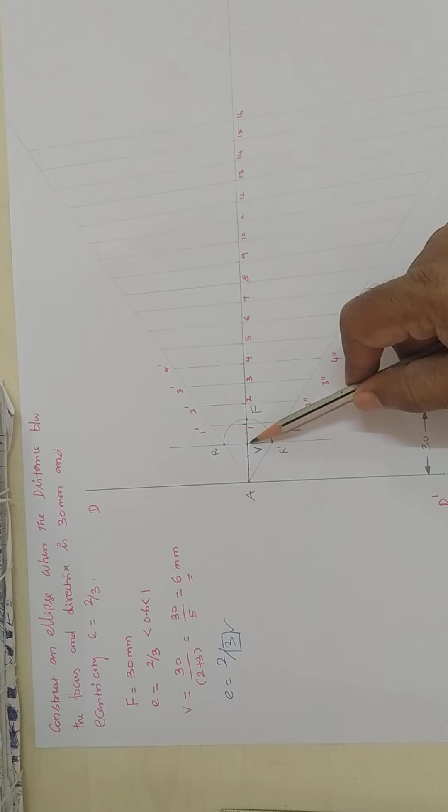Dear students, after marking the 10 mm, 10 mm, 10 mm, the distance between the lines is 10 mm. Then draw the vertical line on each point which intersects the horizontal line. Okay. Then after that, you have to give the name after the vertex point as 1. That number is given as 1. Next line is 2, 3, 4, 5, 6, and so on.

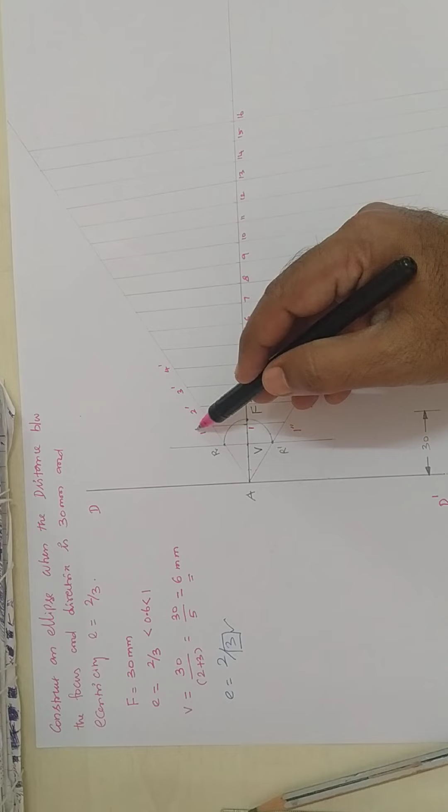For the number 1 line, the top representation is 1 dashed and the bottom representation is 1 double dashed. Here it is 2, second line, top is 2 dashed and 2 double dashed. Third line 3 dashed, 3 double dashed. Fourth line 4 dashed, 4 double dashed. And fifth line 5 dashed, 5 double dashed. 6 dashed, 6 double dashed. 7 dashed, 7 double dashed. 8 dashed, 8 double dashed. 9 dashed, 9 double dashed.

Definitely you have to mark these points, very important, because based on this measured value we are going to make an arc in the drawing. 12 double dash, 13 dash and 13 double dash. Okay.

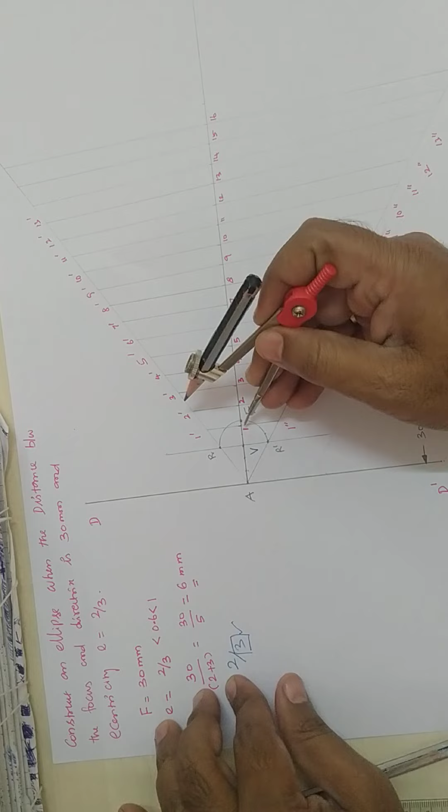Next I am going to measure the values with the help of the compass. First, I have to take the vertical distance from point 1 to 1 dashed. You remember why I told you the numbering is very important? See here, I am going to mark 1 to 1 dashed, right? Vertical distance 1 to 1 dashed, and I take off the compass. Then go to the focus point, keep the focus point as the center. You make an arc on the same line on which you measured the height.

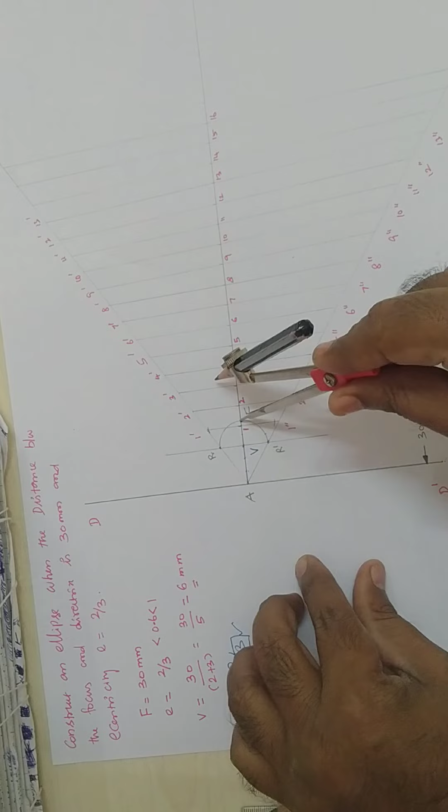With the focus point as the center. Next, measure the value from 2 to 2 dashed. Okay, then go to the focus point again and make the arc on the same line. This is very important. Then go for the third line, measure the height of the third line, then move to F, make the arc on the same line. Here it is.

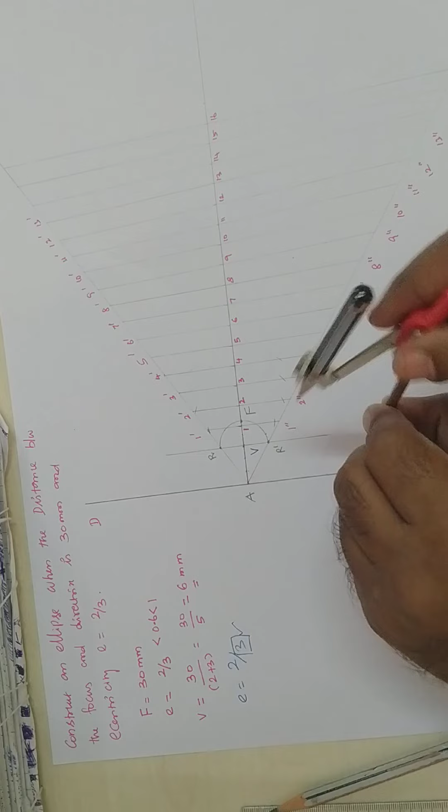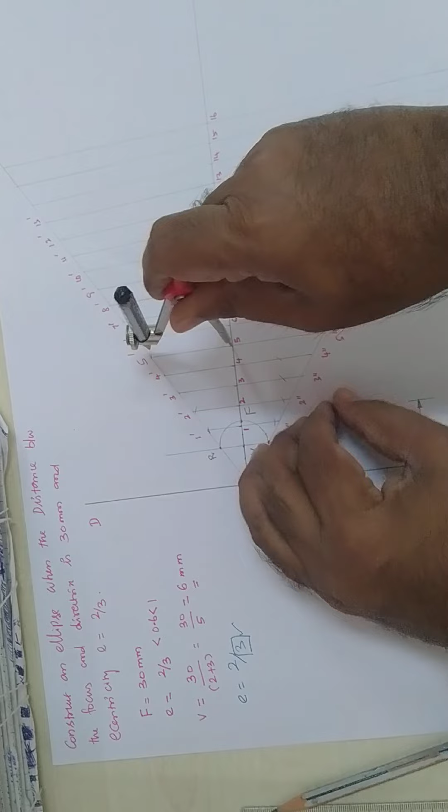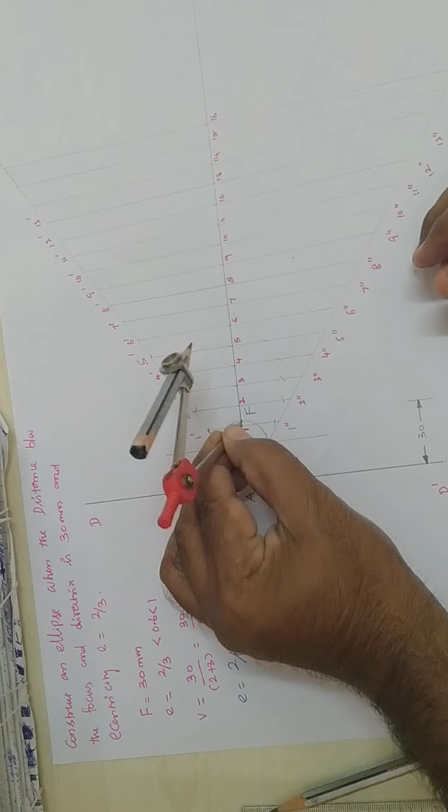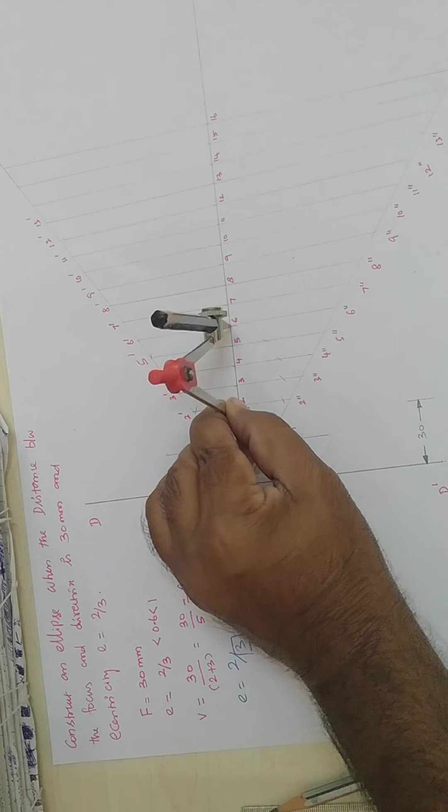Then after the fourth point, from here focus point 4, and here it is the focus point. Then go to measure the value, taking the vertical distance 5. Go again to the focus point, cut the same line, 5th. Okay, then measure the value of the 6th line, go to the focus point and cut the line. For the 6th line it is not intersecting; instead my arc intersects the horizontal line, so the ellipse portion is over.

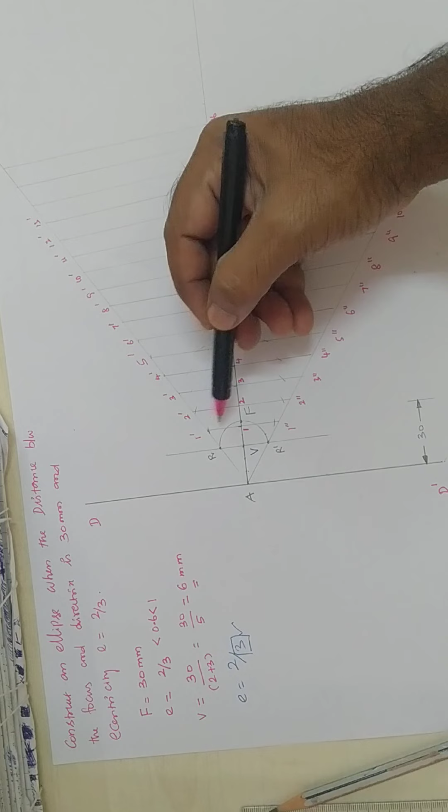Okay, so every time you have to take the vertical height from each and every point. For example, 1 to 1 dashed. Take the compass with the same measurement, keep F as the center, and from here make the arc on the same line.

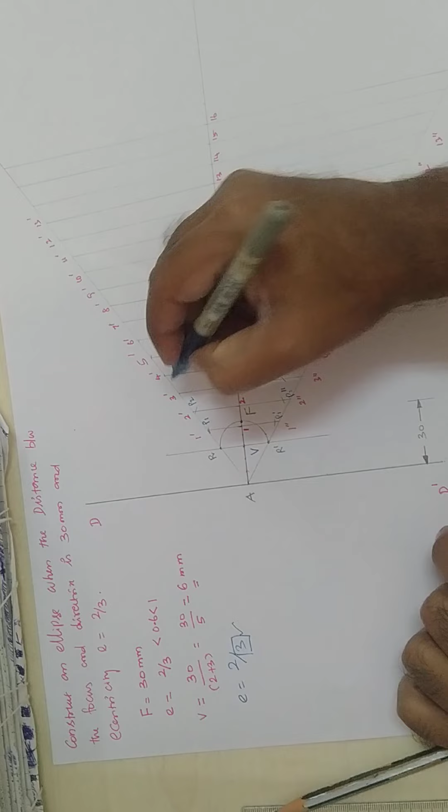So we are getting many points here. At this point I am giving P1, here is P1 dash, here it is P2, P2 dash, here it is P3, P3 dash, P4, or otherwise P4 dash, P5, P5 dash, and here it is P6 and in the downward direction P6 dash.

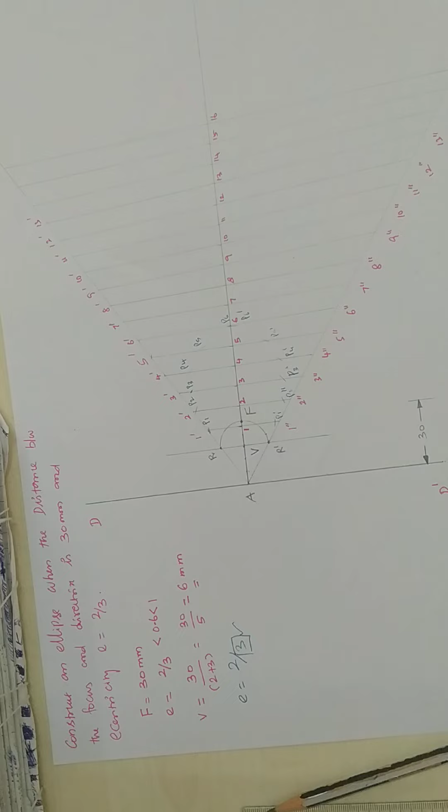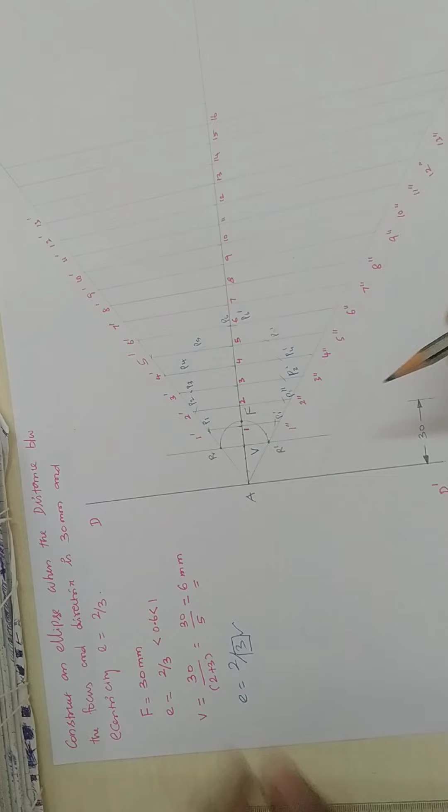Okay, now we are going to construct the ellipse. In this drawing, the ellipse shape is small because the given value is small. So how to draw the ellipse? By joining all the points P1, P2, P3, P4, P5 and P6. First you have to draw a very light line because the shape is very important. It won't come right at the start, because some students make mistakes drawing uniform curves, so you have to draw a very light line through the points. So it comes as the ellipse.

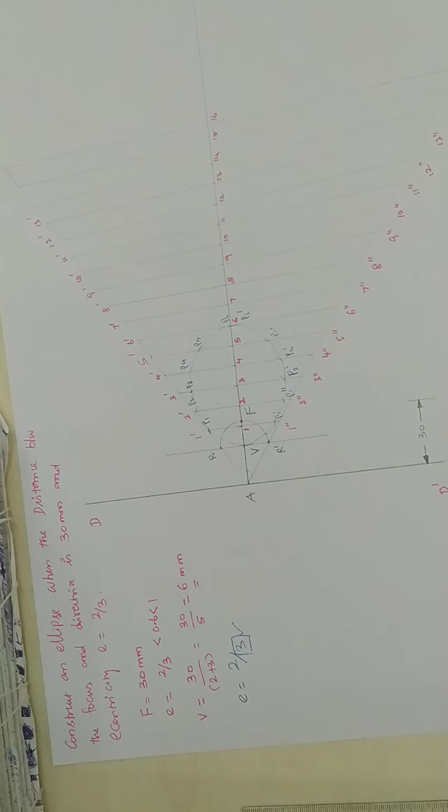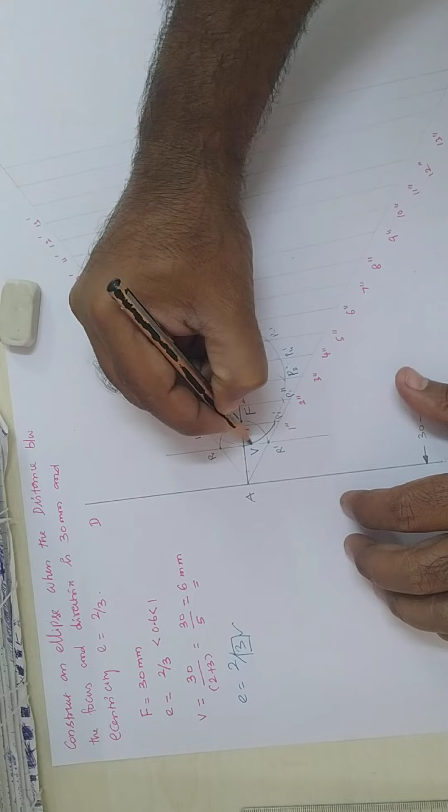So now I am going to darken it. See here, I made a mistake here. The line is bent, so I have to make a correction on this. Okay, so by joining our points only, it should go neither above nor below, by joining these points which we got in the drawing by measurement, right? So the ellipse comes out perfectly.

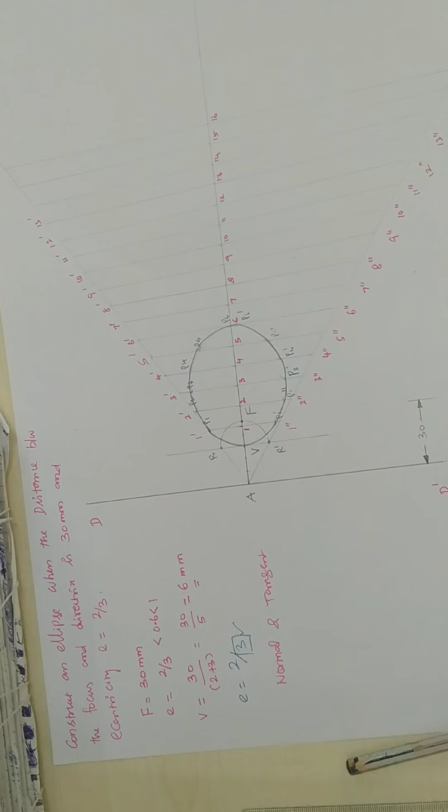The next step, we are going to find the normal line and tangent. To draw the normal and tangent, you have to mark any point. I am marking one point here, as Q. Okay, I am going to mark any point, any position on the ellipse curve, as point Q.

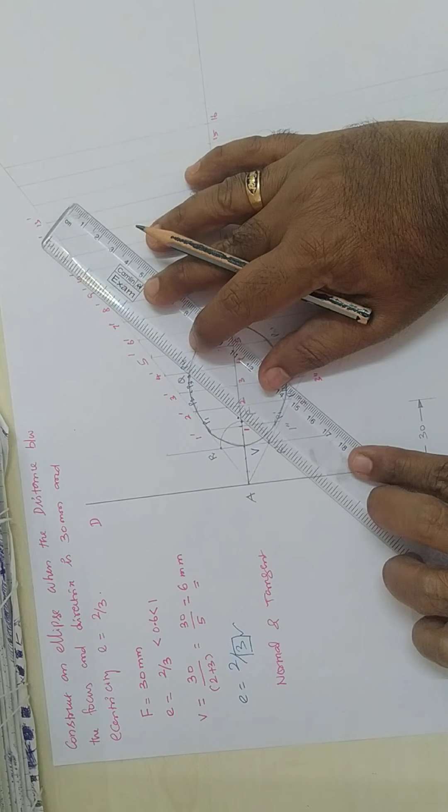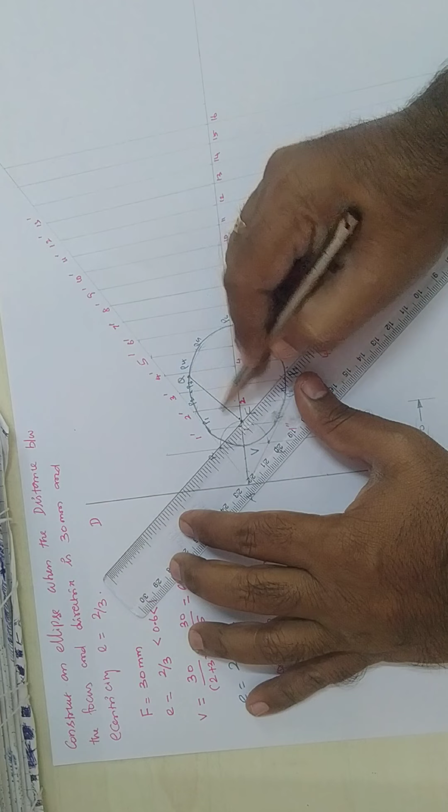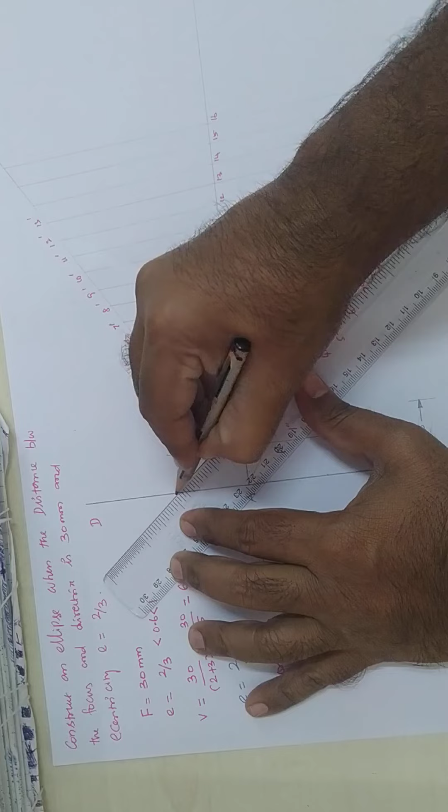First step, you have to join these 2 points, Q and focus F. Okay, I joined Q and focus F. Next step, draw the 90-degree line to the FQ line. Use the protractor and draw the line perpendicular to the focus-to-Q line, FQ line, intersecting the directrix. Stop when it meets the directrix. Give it the letter S.

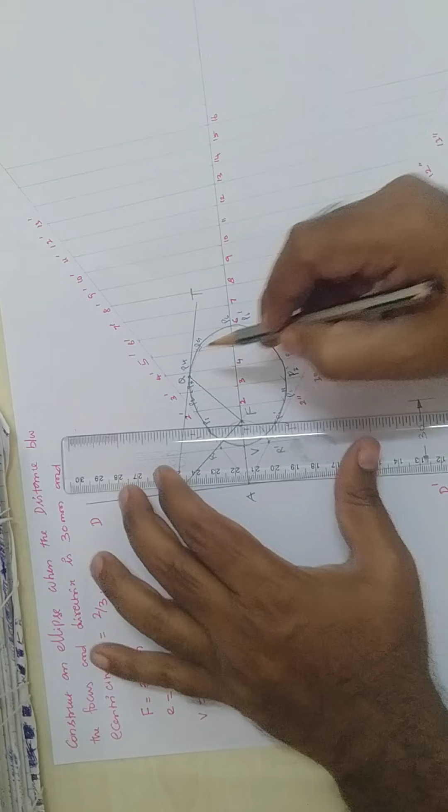From here you have to connect the Q and S line. This is called the tangent line. Okay, then use the point Q, and draw the line perpendicular to the line ST through point Q. Okay, I drew it here. It is the normal line.

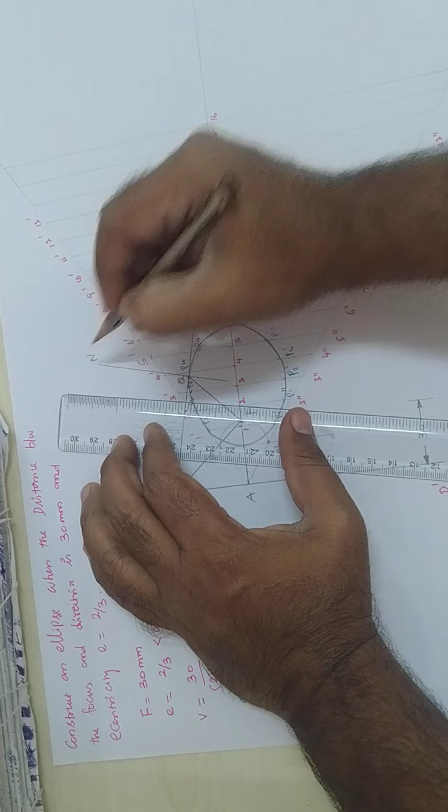That's all about the construction of the ellipse. For this you are getting 20 marks. I am representing here ST and N: T is the tangent line, N is the normal line.